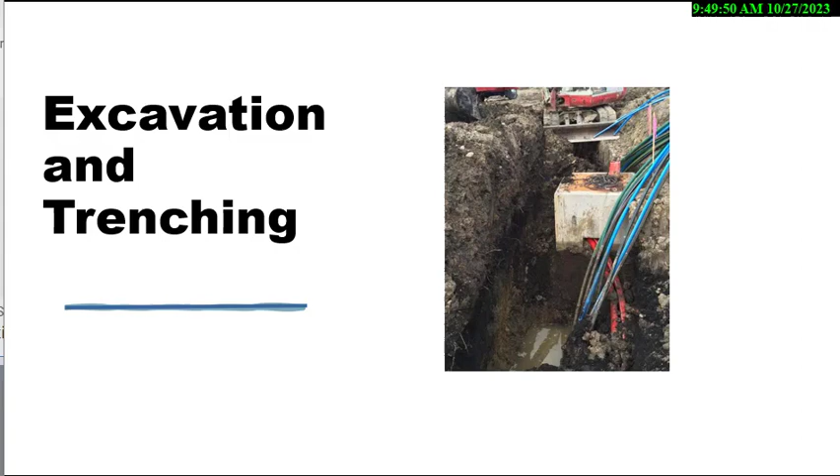The learning outcomes: the trenching and excavation side is covered in the CHST, ASP, SMS, and STSC.

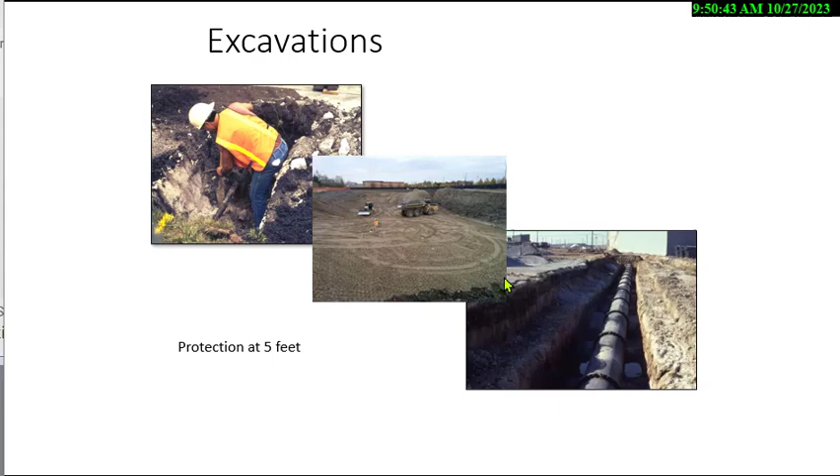There are many methods to protect the person. You have to have cave-in protection at 5 feet. So if you're only 3 feet deep and there's no dirt at the edge, you would make an assessment, but otherwise there was probably not a cave-in hazard. You can use benching, which is in the OSHA standards. You can go up maybe 3 feet, back 3 feet, and so on. They give you criteria, and that's going to be beyond this level of class.

One of the things OSHA pushed in 2018, they want to see fall protection when there's a hazard of falling in. That rule starts at 6 feet. We're looking for guardrails, so all the manufacturers of these protective systems usually make a guardrail system that they can use to prevent somebody from going through.

We want our ladders for access to extend 3 feet above the trench box.

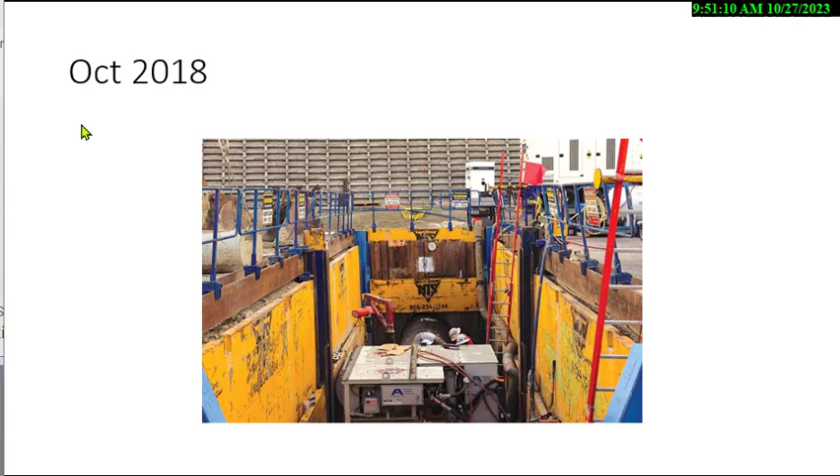The competent person is somebody who has the ability to recognize hazards and take action. They have to know how to do soil classification, the protective systems, and the OSHA requirements. Usually a competent person is tested - they're given a class and tested on their knowledge of it. I teach a typical class for a competent person at about 6 hours.

In this landfill, we are only about 4 feet high. There's no dirt at the edge, but they have to make an assessment of what kind of gases could come up. Hydrogen sulfide and methane are very common gases. They would wear a meter if they were going to be in this trench just to spot or detect anything that might be easing out of the ground.

But what's missing is a ladder. We would want a ladder in these trenches. That ladder rule starts at 4 feet.

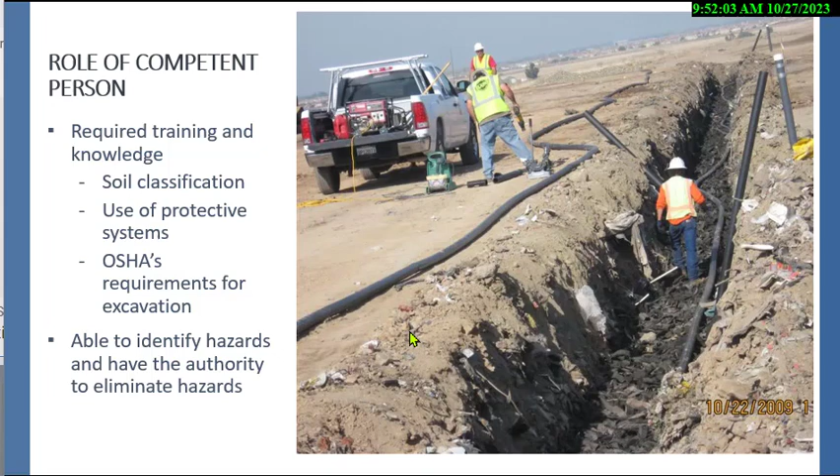So one of the knowledge checks, we'll just go over a few of these during the class. An excavation is performed in an old landfill. What should the air be tested for? Carbon monoxide and methylene chloride; carbon dioxide and sulfur dioxide; hydrogen sulfide and methane; dimethyl bromide and ammonia.

Excellent job. The answer is hydrogen sulfide and methane. People would just type the answer in the chat here.

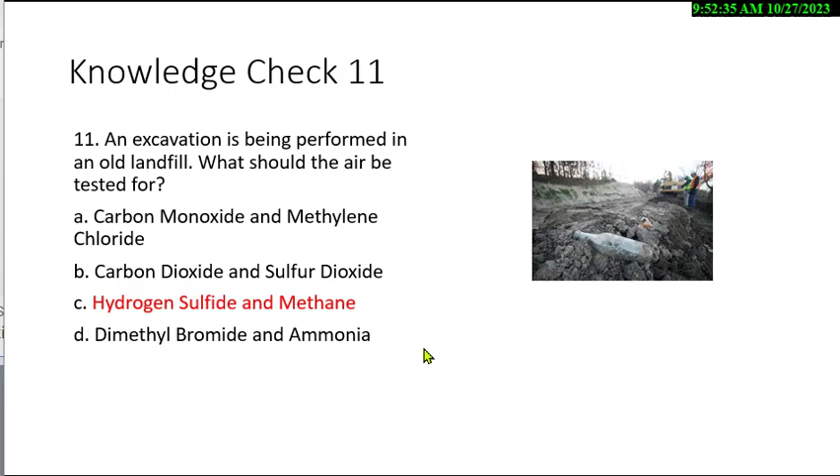Again, a cubic foot of soil is only going to weigh about 100 pounds, give or take about 20 pounds or so. A cubic meter of soil is going to weigh quite a bit - 1,200 to 1,700 kilograms, or about 3,000 pounds, give or take about 400 pounds. It's a lot of weight.

When it collapses on top of you, you have hundreds of kilograms, hundreds of pounds on you. You're not going to be able to breathe out. Your diaphragm sucks in the air, and it's going to be hard for it to push out, and that's how you get killed - you get asphyxiated because you can't breathe.

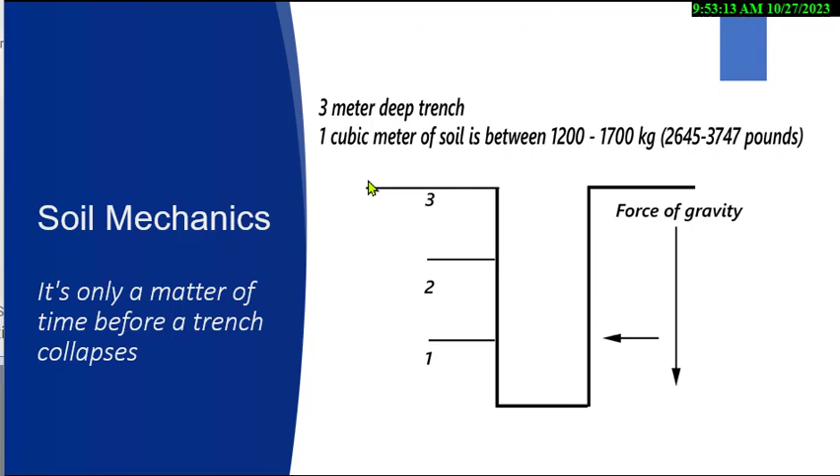Daily inspection of the excavation, the adjacent area, and protective system shall be made by who, for evidence of a situation that could result in possible cave-ins, indication of failures of protective systems, hazardous atmospheres, or other hazardous conditions? A: the competent person. B: the general contractor. C: the qualified person. D: the registered professional engineer.

Excellent. A is the answer.

People ask, what is a qualified person? Someone with extensive knowledge and experience that knows how to do the math, as I call it. They're able to go in and qualify and say, if we wanted to freeze the soil, our system here can work on a 10-foot deep trench, and we're going to put this method, and it'll be a protective system. A registered professional engineer is needed at 20 feet.

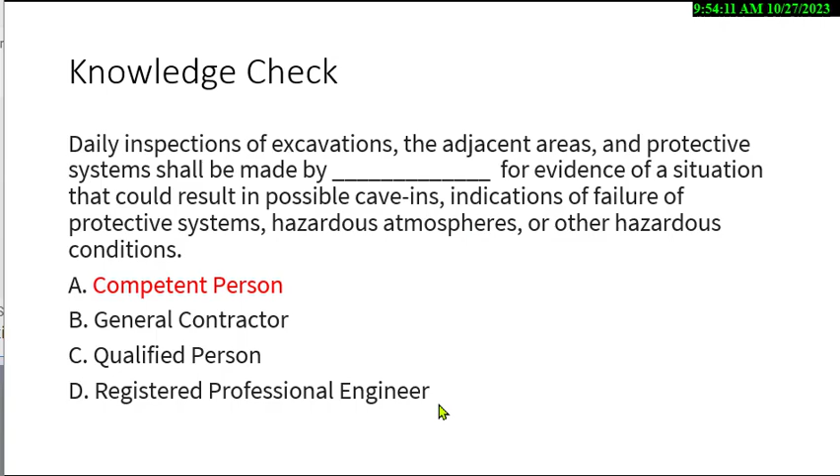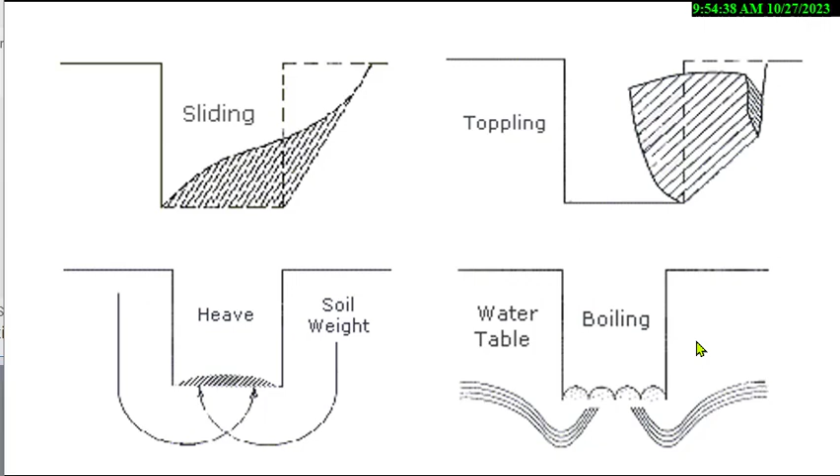Trenches and all excavation collapses happen in different ways. It can slide in, it can topple in. If you got an opening, the soil wants to heave or come up, especially in change of weather. If you got water, it makes the soil weaker, so water is automatically going to be soil type C. It wants to literally dissolve the soil and push it up. And these areas could be type A soil, but it's just going to crack and then come right in.

So the competent person is going to inspect the excavation every day before people get into it, and they're going to look for the hazards that could happen.

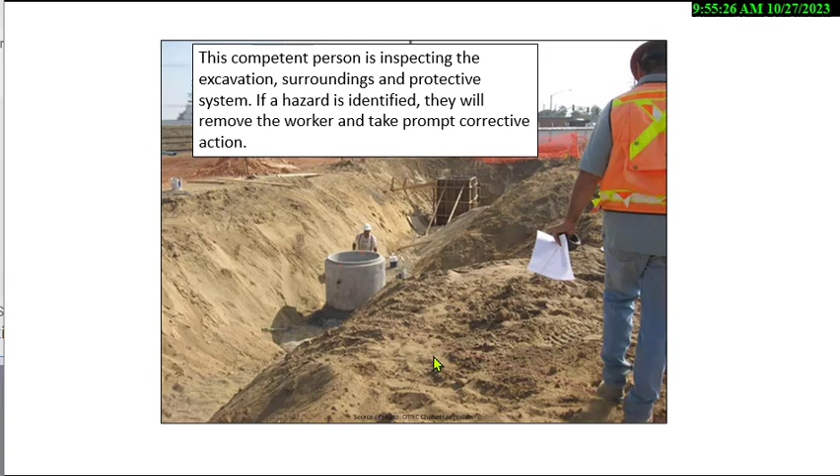You can use shoring, sloping, benching, or shielding. A shoring system is designed by an engineer. They'll give you tabulated data. Some people call it the owner's manual, but it's called tabulated data in OSHA. It's going to tell you how far to space it, how far it's got to be from the top, how far it's got to be from the bottom. There are different types of shoring systems. Some are 4 feet, some are 10 feet. You can buy a lot of different combinations.

35 years of good, safe practice. Sloping - this is a soil chart for C. You're going to slope it at 1.5 to 1. So if it's 10 feet up vertically, it's got to be cut back 15 feet. All this excavated earth here is going to be taken out.

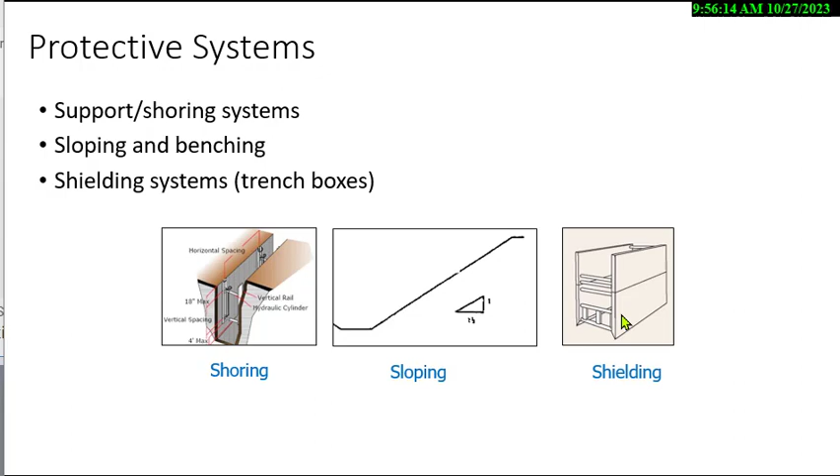I like the trench boxes or trench shields. They're designed by engineers. They can take a lot of weight. I've never seen a trench shield buckle in over 30 years.

So the shoring system can be a lot of different ones. They'll tell you how far you got to space it, the size of the cylinder. Everything's going to be on a tabulated data.

When we're over 20 feet, you got to have some protective systems. In this case, it could be wood or it could be metal. You could take sheet metal and put the wood in here, hold these by certain size timbers. They actually have engineering charts in OSHA that you could follow in these cases. The engineers, if it's over 20 feet, they're going to have to use some calculations and determine what would be necessary.

One of the things that Zurich is doing, because they write up a lot of worker comp, is an activity hazard analysis, because you're out there looking at the trench and excavation hazard and you can miss the other things. Like this stair rail does not have a mid rail. You need a top rail and a mid rail. This platform area doesn't have a rail, and the lower stair doesn't have anything at all. So these are things you have to look at, as well as the cave-in hazard.

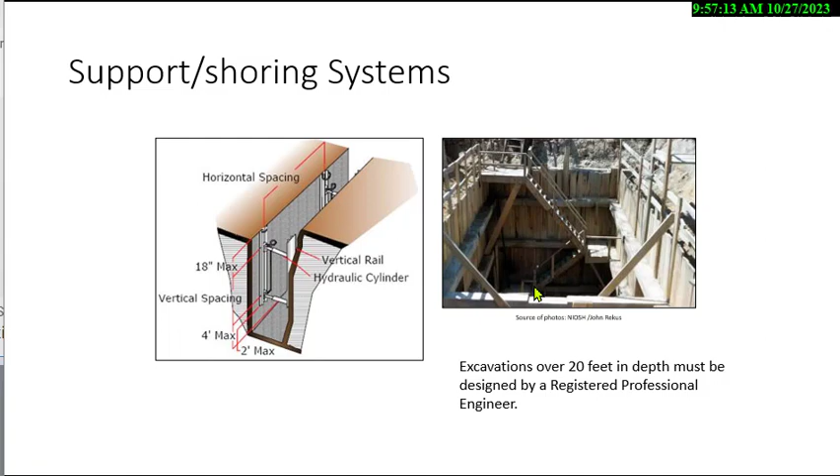Sloping is going to be at 34 degrees for type C - that's 1.5 to 1. B soil is 45 degrees - this is 45 degrees here. 3/4 to 1, or 53 degrees, is going to be A soil. The other soil type, believe it or not, is called stable rock. That means you dig it. In our area, we have limestone rock - it'll stand up for years. I have excavations that were dug 40 years ago and they're still standing up vertically.

They have different soil types. Cohesive soil is the most stable. It has clay in it, compressive strength of 1.5 tons per square foot. B soil is silt, loam, angular gravel, 0.5 to 1.5 tons per square foot. Sandy gravel is less than 0.5 tons per square foot. It's mostly sand is what I run into.

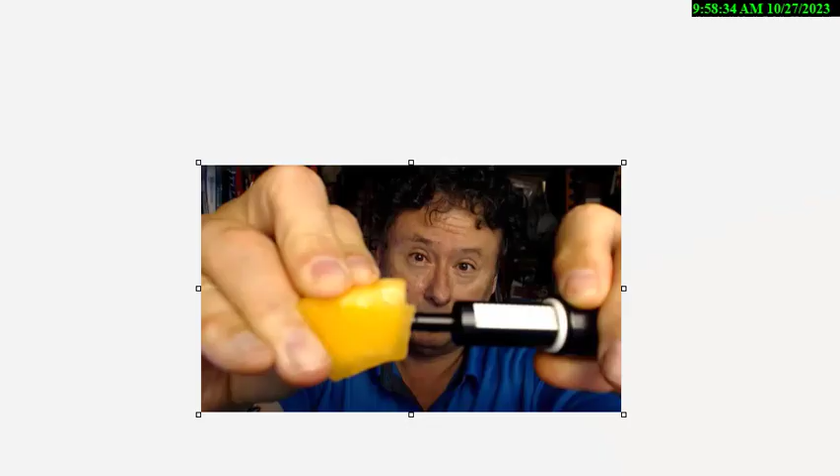So you can buy a pocket penetrometer for $100. It'll read how many tons per square foot. I would just take an example in the practice session. I used a cantaloupe and got 1.2 tons per square foot. That's a method to do it.

You might want to take 3 samples of the different soils as it's being excavated, and you would measure it. Now obviously it won't be cantaloupe, it'll be dirt. But if I measure 1.2 tons per square foot, that's going to fall in the B range. So they've asked questions such as: I have soil that's mostly silt and silty loam, I measure 1.2 tons per square foot, what soil type is it? And it would be B soil.

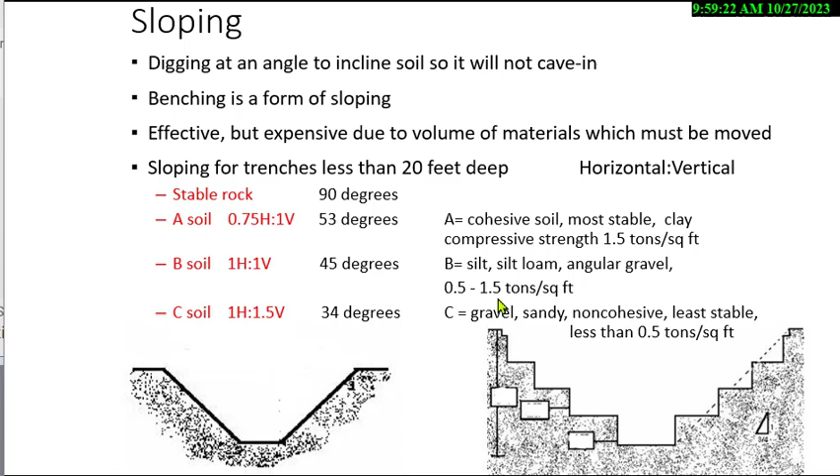Shoring prevents cave-in, and the idea is that you're going to make sure it's pushing against the soil. It can hold the weight that the soil wants to collapse into it. Again, all these systems are really based on engineering diagrams. This one, you can see the shoring is very close together. That's because maybe the manufacturer will say you can use this in all types of soil, but you've got to follow the criteria.

In sandy soil, this is going to have sheeting behind it. Here we got wood shoring. Follow the tables in OSHA or have an engineer make one for you, but wood's so expensive. If you want to get a 6x6 piece of lumber here for your wales - that's what they call the horizontal members, wales, or it looks like it's wale, but it's wales - this is going to cost hundreds of dollars. That's not something that's very easy.

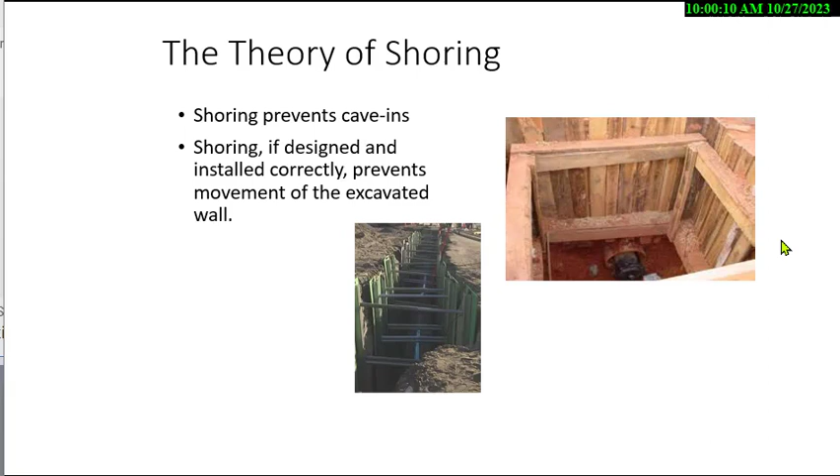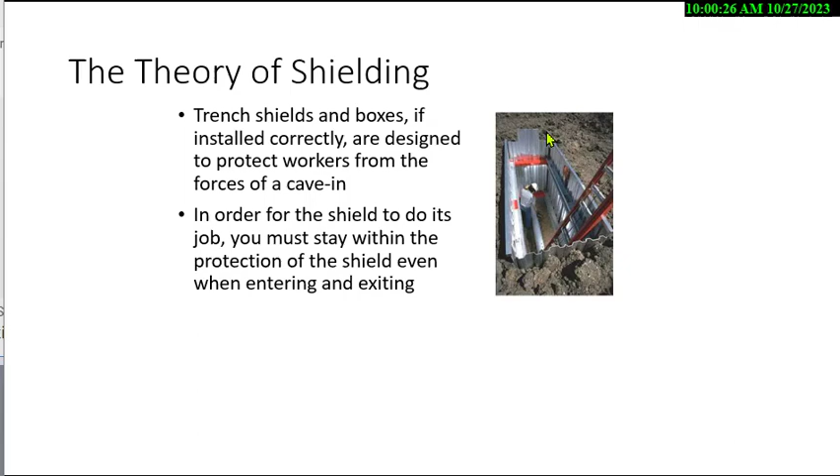Part of the shielding is that the boxes, they're making them smaller and stronger, and it's nice because a lot of these will fit on the back of a pickup truck. You don't need to have a semi-driver with a CDL license. Here we got our ladder 3 feet above the landing. We're getting to do the work, and that protective system is going to protect that worker.

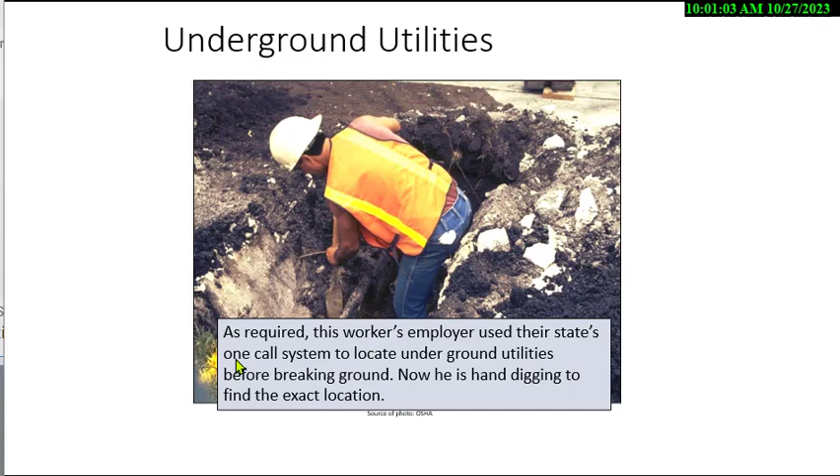Underground utilities - you got to use a one call. In our area it's 811, or we call it Julie. You got a yellow line, it's gas. You got to hand dig within 18 inches of this line to show this gas line right here is there. And you know, you may be putting in a water line or a sewer line next to this line, and that's part of the whole thing. You have to think about where's it going to go, how deep is it, is our line going to interfere, are there utilities crossing? So they have to come in, they use locating equipment, and they mark these lines.

Only on tests like the CHST, they may ask you what red or yellow is. Red is electrical, yellow is gas. There are other colors recognized by the agencies, but they haven't asked about that.

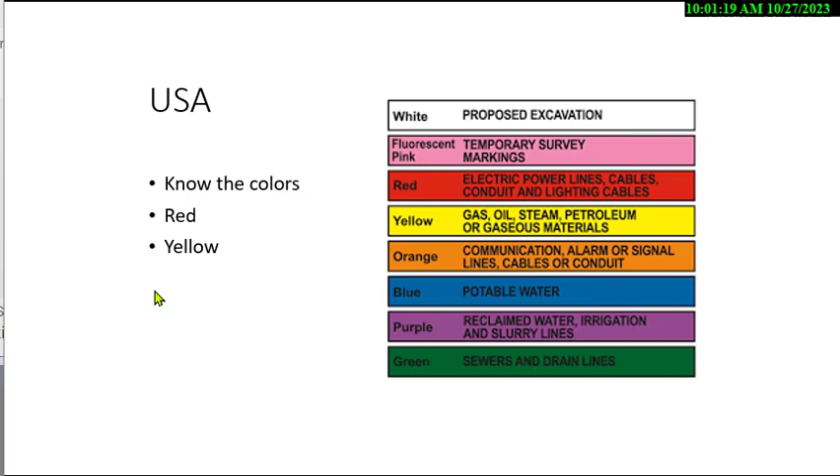Very good - registered professional engineer.

Utility companies by OSHA must be called 24 hours prior to excavation. Julie is going to require, or our state is going to require, 48 hours. Eventually a lot of states will probably have 72. They are digging at a record amount across our state, with 1 million calls into Illinois through the one call system. And I mean one call means you make a call to the Julie group or the 811 group. They call the utility, the gas company, and instead of you trying to call 12 people, they call everybody that might be involved.

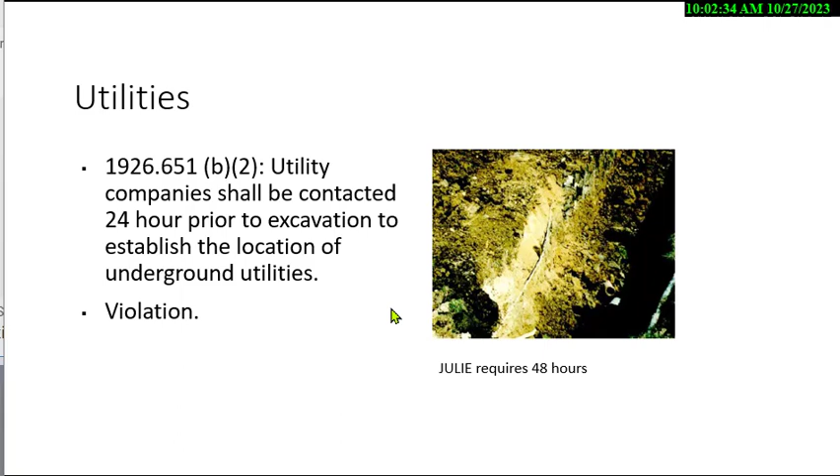The spoil pile, or excavated earth—spoil is a term we use out here in the Midwest—has got to be 2 feet away, as shown over on the right.

First question I'm looking at: where's our ladder? How deep is it? These are questions you have to look at as a competent person doing a safety audit.

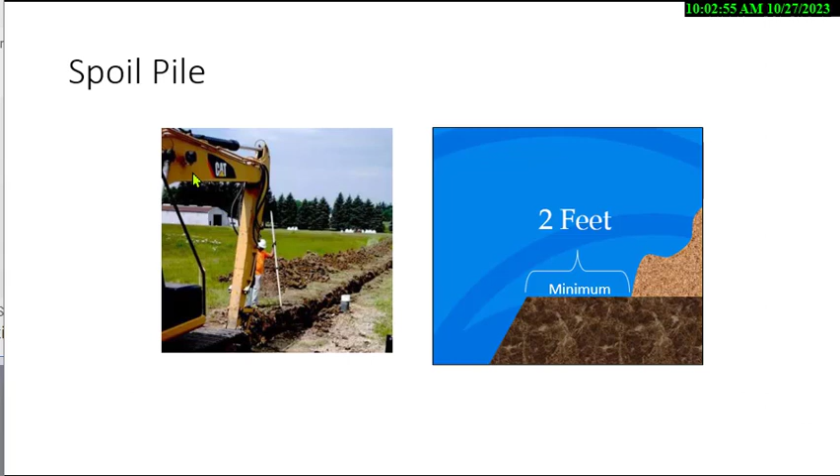Hazardous atmospheres have to be checked at least 4 feet deep when oxygen deficiency or hazards could exist. Anything with a live sewer main, you could have toxic gases like methane, hydrogen sulfide. Other equipment—if you run a generator, you have carbon monoxide hazards. You have a gas can, you have gasoline vapor.

People often have a hard time thinking, I'm up 8 feet, it's 7 feet wide, why do I need it? It's got air up to the top. But remember, all the hydrocarbons and solvents generally go down low, so that's where the point of danger is. Methane rises up into the air, but if you get a lot of methane, you can have an explosion.

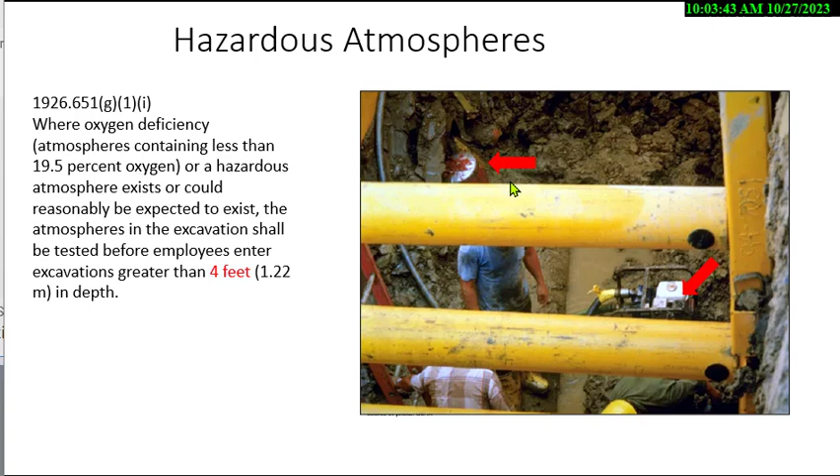I'll give you an example of a death out in Houston or Dallas. They were out there—you would have checked the air. They had a nice protective system, ladder 3 feet above the landing, but they hit a live sewer main and the gases... if you had a meter in that trench, you would have picked up that toxic gases were starting to seep out.

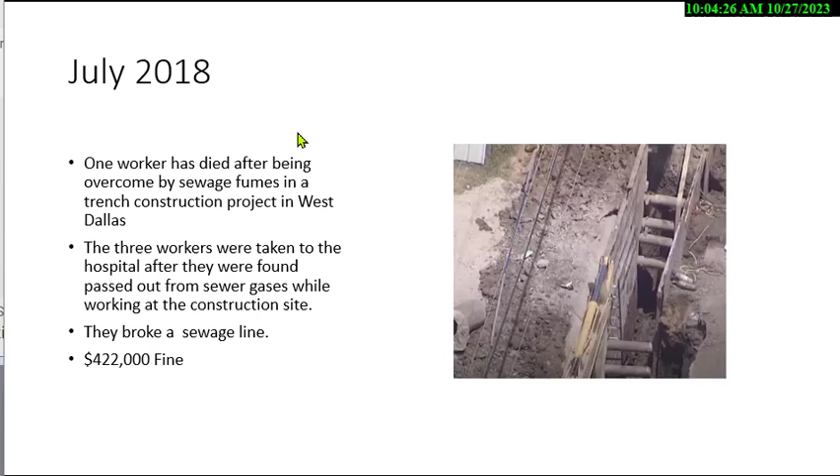Everybody get out, get out. We're going to run ventilation systems to blow and clean the air out. We've got to try to block the sewer. That may require an SCBA or something—you've got to make it safe to go back in there. But if you don't think of the hazards... hydrogen sulfide smells like rotten eggs, and it can kill you with a few breaths if you get enough of it in. That's why you have to think about taking a meter on these live sewer mains.

So the knowledge check for soil classifications: A, B, C, or D. A, B, C, or solid rock. A60, A20, B, C, or ABC Waterlogged C.

Excellent job—it is indeed A, B, C, and solid rock.

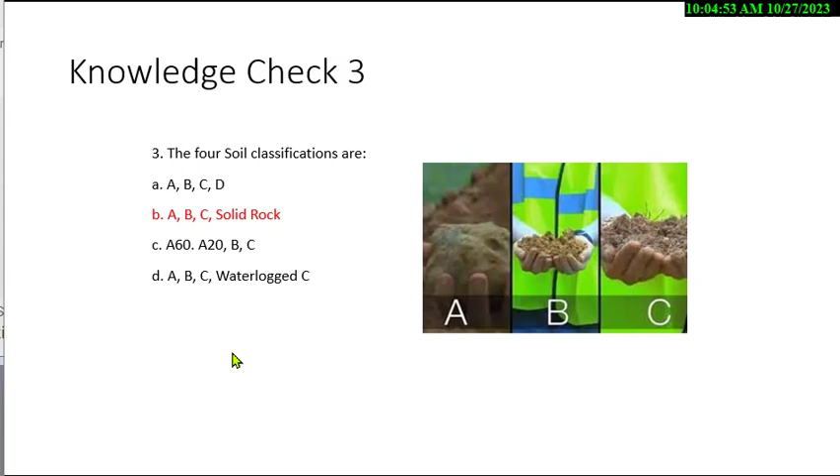Water makes it weak. Remember, if you take a chunk of dirt and put it in a bowl and start pushing around it, it's going to start dissolving that dirt—that's what water does to the soil. It makes the soil underneath so bad that it just cracks off, so you've got to pump it out. That's one of the things a competent person checks.

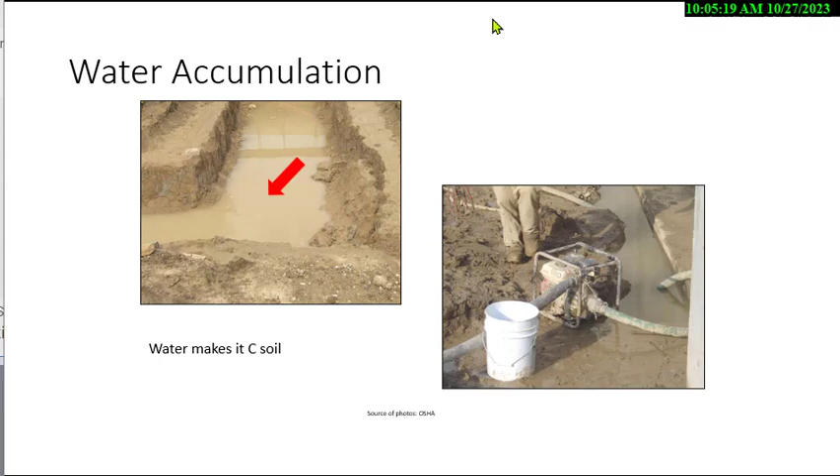A lot of areas this month, in October here, we have a lot of rain. So every day you're checking for water in the trench, because it's going to change it from an A to a C, or a B to a C.

The ladder not being 3 feet above the landing is the number 2 most cited OSHA violation of all. I was dealing with a contractor this week that didn't have the ladder 3 feet up right at the edge, didn't have the dirt pushed back 2 feet, and had the box too low. They got cited $8,000 for the ladder—an $8,000 ladder—when one mile, one kilometer away, they had 50 ladders in their machine barn and could have gone into the shop and gotten a longer one.

This whole crew knows it—they've been trained. That's tough for a company to accept. You've done the training, but now you have to sit down with this crew and talk about what we expect. In the audits, they weren't doing it—every crew, every month—and they've got to change that, because you will find this out.

This didn't just happen the first time—I'm sure it's happened multiple times. But if you've only audited this crew once a year, who knows what they're doing the rest of the summer. You need to get out there; you'll find these crews that are not doing it right.

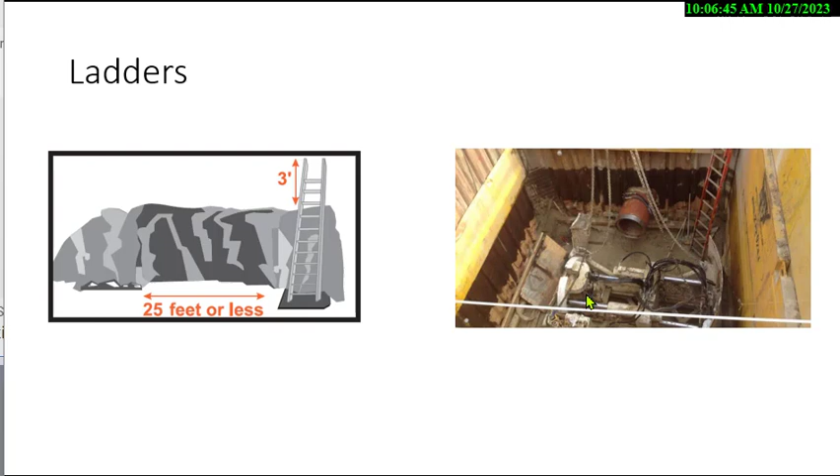Knowledge check: spoil piles must be excavated how many feet away? 1, 2, 3, or 4?

Excellent, it is 2 feet. I show a lot of good pictures. When I do audits, they should be 98% right. Everything is done right. I got my ladder, I got the spoil pile away, we got our cave-in protection. I like to show the good, because if you got a good program and a good company, you should see nothing but good. Show the workers in your company doing it right. That makes a big difference.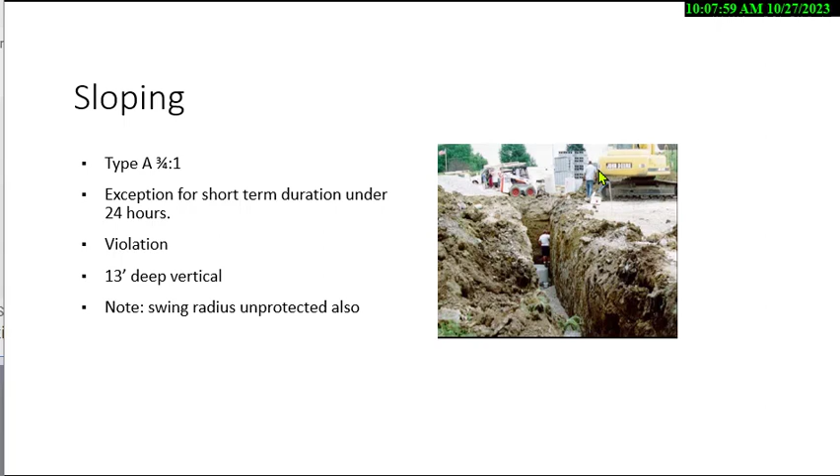Some people, they don't care. They have no fear. He's in a trench 13 feet deep. It's supposed to be A soil. You would cut this back 3/4 of 1, or about 9 feet. That means 9 feet cut back of all this dirt, 9 feet cut back off this dirt. You got spoiled dirt at the edge, no cave-in protection, no ladder, no hard hat, no safety glasses, and so on. That's no good. Swing radius means this counterweight can kill you. If it hits you, it's going to knock you down. If you get caught between this and the track, it could kill you.

So, another scenario-based question. You're the safety professional conducting an audit for one of the crews for safety compliance with the company's program. That's why you do audits, to make sure that they're following what you think they're supposed to do. The professional spots the worker in a 13-foot deep trench with vertical walls, kind of like our picture before. It is 5 feet wide. The soil appears to be A or B. What should be your first action?

Offer the workers an excavation safety class. Ask to see the job hazard analysis. Conduct the soil analysis to classify the soil. Have the employees exit the trench immediately.

Excellent, this is going to kill him. When we go back to this trench, that can cave in and kill him instantly. You got to get him out. Got to talk about it and talk to the crew. What's going on? Why aren't we doing this? We have everything there to do it right. It makes me upset when I see all the protective systems sitting there by the trench and they're not using it. That's a tough management situation because the boss has to make a decision. Why is this foreman, my crew, not using what they got to use? They got it right there.

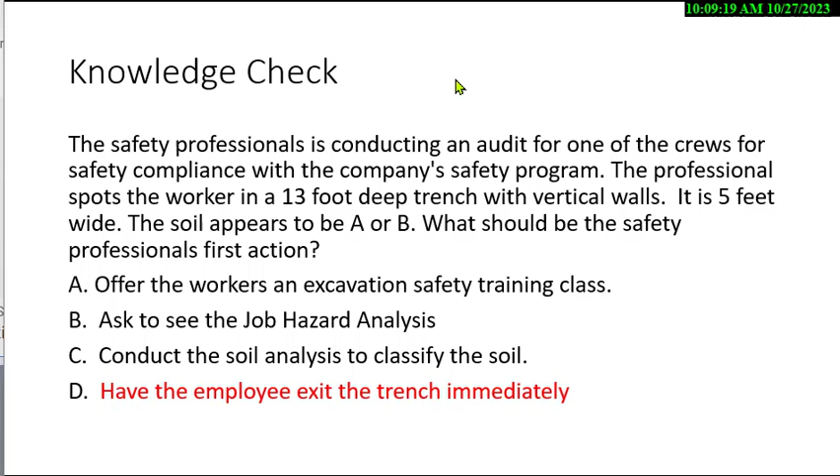So when we talk about collapses, this case, it's 8 feet deep on the left side, 15 feet high on the other side, and the chunk hits this guy in the ribs and breaks 4 ribs. It's lucky it didn't kill him and collapse this whole thing. The 15-foot stood up in the middle of the winter.

So we're going to test the soil after they get him out of the trench. We have cohesive soil, I can put my thumb in it. OSHA actually recognizes this thumb testing. It stays together, it's cohesive, it's got some clay in it - that's B soil. If I had A soil, I couldn't even put my finger in it, it's hard as a rock almost. C soil, I can just squish it. It's usually sand, it just squishes apart, no cohesion at all.

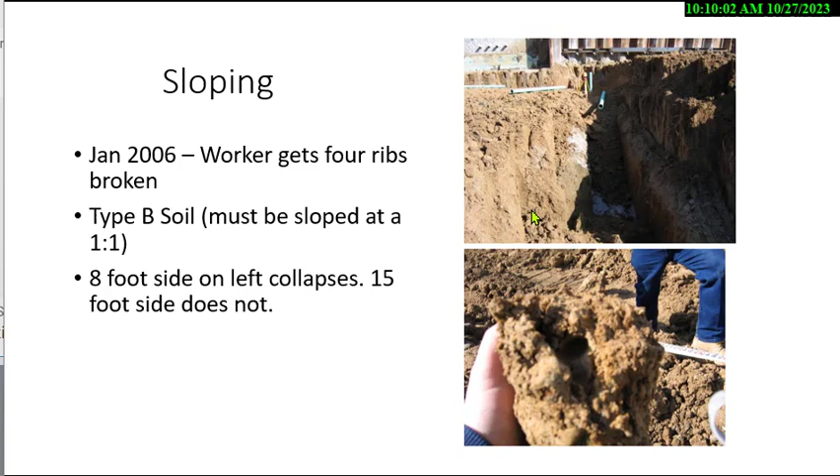A ladder shall be within how many feet when placed in the trench? 10, 15, 20, 25. Everybody knows this one by heart. 25 is the right answer.

So here we are, we got a ladder in the trench. That's good.

Trench boxes must extend 18 inches above the grade or bank. So what we're talking about, they had the trench box too low. Not this company, but this is what it kind of was like. OSHA is going to require you to go down 18 inches, or approximately here, and then do the 1-to-1 if it's B soil - you put your slope at that point. You wouldn't start from the top of the box, you wouldn't start from here, you go down 18 inches. The idea is that 18-inch lip is going to prevent anything from rolling in.

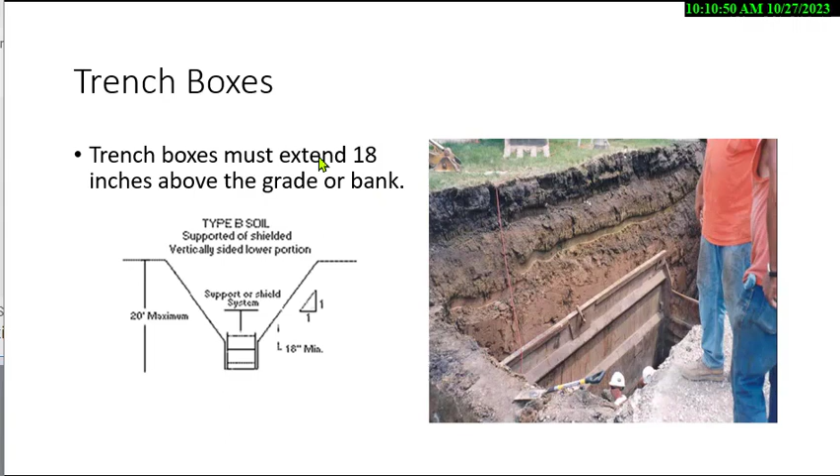Knowledge check, this is hard. 1 out of 10 people can get this because it is a math question. The CHST questions, sometimes this is called math. It's as tough as they get.

Trench is 4 feet wide at the bottom, 8 feet high on the vertical walls. We classify the soil type as B. What would the top width be if we're going to use pure sloping as a method of protection? 6 feet, 8 feet, 10 feet, 20 feet.

Okay, it is 20 feet. Should be red, 20 feet. We have 4 feet wide at the bottom, 8 feet high. From here to here, 8 feet. From here to here is 8 feet. We have to do it at a 1-to-1 slope. We have to cut out all this dirt, 8 feet. So when we measure from here to the vertical of this toe, it's going to be 8 feet plus 4 feet plus 8 feet, which is 20 feet. That's your answer.

So there it is, 20 feet.

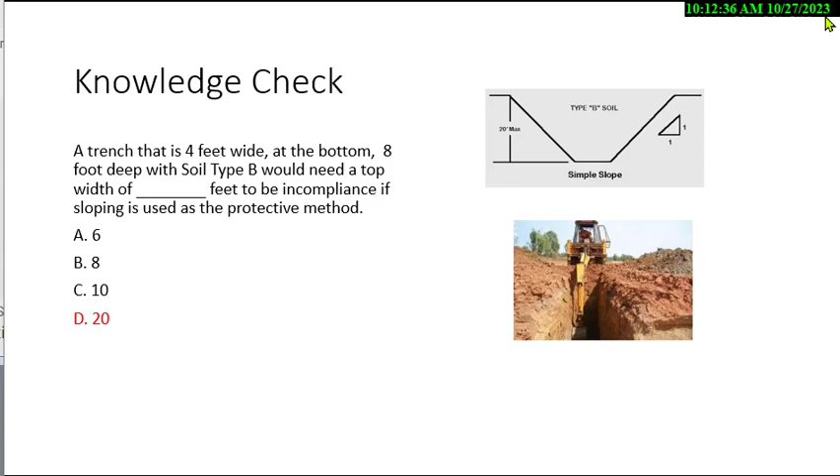Soil cracking due to vibration from traffic. Soil type was classified as C. If you can feel the vibrations or see cracks like these, it's going to go from an A to a B, B to a C. The rules we teach in OSHA say you've got to feel the vibration. A good analogy - if you watch a train pass and you're like 4 meters, or 15 to 20 feet away, you'll feel that train vibration in your legs.

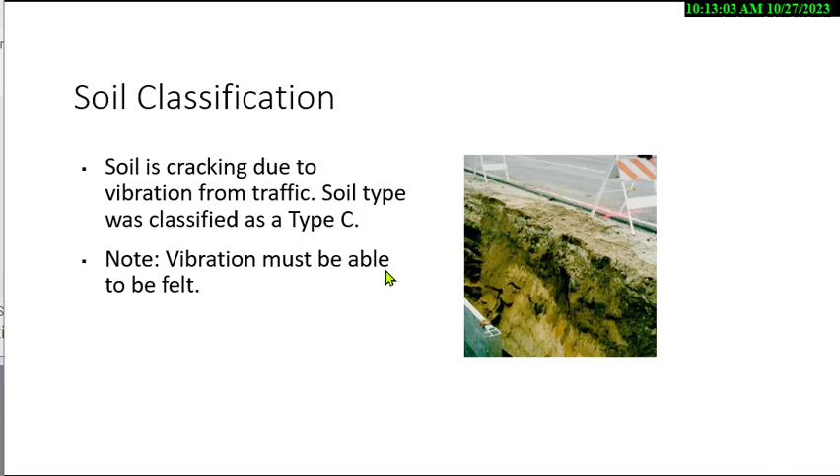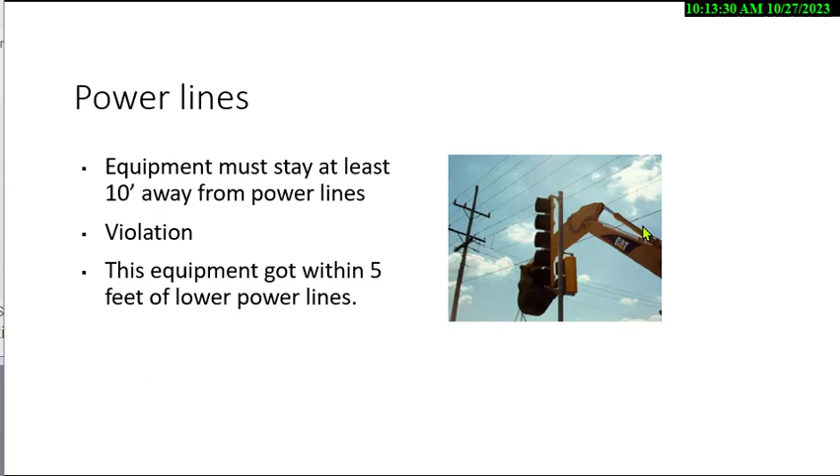Power lines kill somebody every week - one person dies a week, 50 a year. You name it, it hits it. Excavators hit it too. These Caterpillar excavators can get up 10 meters, 33 feet in the air, and get right on these insulated power lines at 7,000 volts. That's the violation - this is within 5 feet of it because it's past the cable TV line. Cable TV is usually about 10 feet below the power line.

The excavator here extends 42 inches. If I pull it out and measure it, that can hit you. I've had people get hit with it, break their chest bone, and fall to the ground. They can't even get up because they can't breathe, and that's a painful injury. We've had people climb up here to go talk to the operator, and then this thing pivots and kills them - crushes them between the top of this and the top of the track.

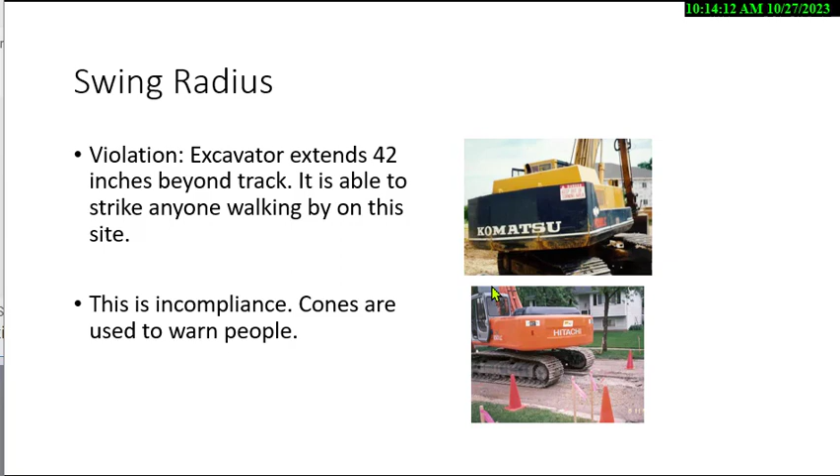So we tell people, cone it off, do something. Have a program in place so when you need to talk to this operator, you give him a stop signal. He's got to kill the engine, then you can approach him. Don't assume he sees you, because that happens in the death cases - they don't see him. The operator says, 'I didn't even see the person.'

And it can be done - all the guardrails can be put on. All the companies who rent or sell it have these guardrail systems, and that's what you want to have.

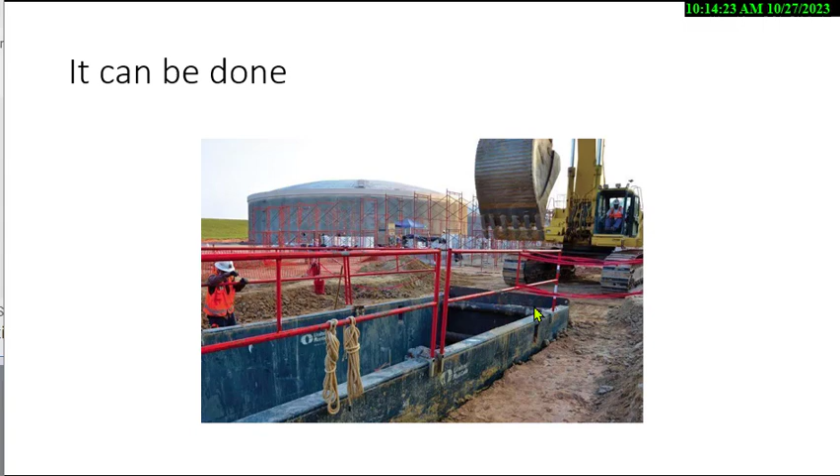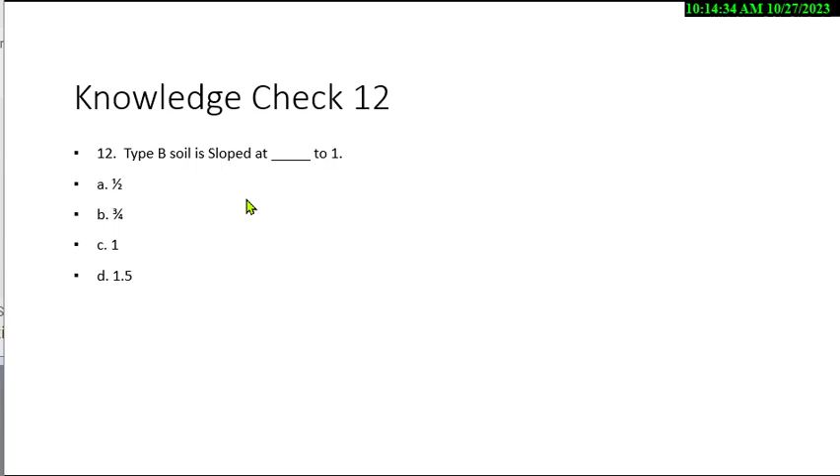Type B soil - this should be easy by now. Sloped at what? 1/2 to 1, 3/4 to 1, 1 to 1, 1.5 to 1. Very easy, everybody knows this - 1 to 1.

Many contractors don't put in end protection. One of the things about these trench boxes - you have an open end. You can use 1-inch steel plate for 8-10 feet easy. If you take B soil, take a 20-foot plate, push 10 feet of it in, 10 feet sticking out, that'll be fine. But when you get over 20 feet, remember you're going to have a hole engineered anyway. In my years, I've never seen steel plate buckle under 20 feet - it's usually pretty good.

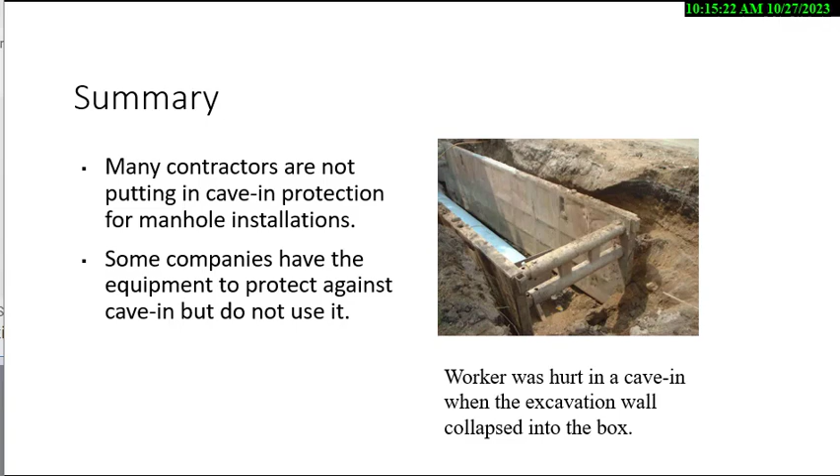Obviously you have to have somebody look at this issue - there's supposed to be some data behind it. But you want that end protection, because I see a lot of cave-ins every year at the ends. They got the sides protected, but you have to remember all four sides can be cave-in potentials. Any questions? All right, I want to thank everybody for coming.